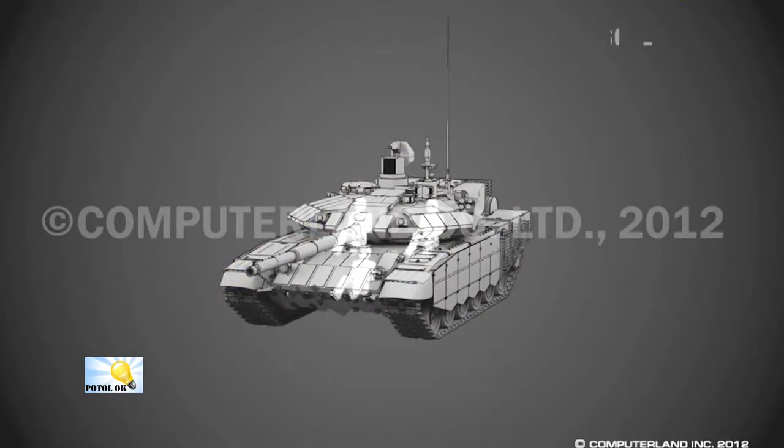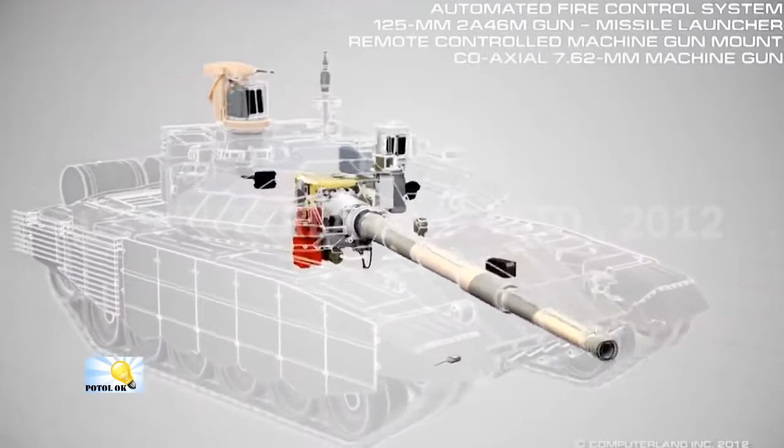In terms of firepower, the new Russian tank is superior to most of its equivalents worldwide, particularly in terms of searching capabilities, speed of target detection, accuracy, and effective fire range. Perfection is accomplished by combining the new automated fire control system with the improved tank gun, the innovative remote-controlled machine gun mount, and the modernized guided weapon system. 2A46 M5 gun.

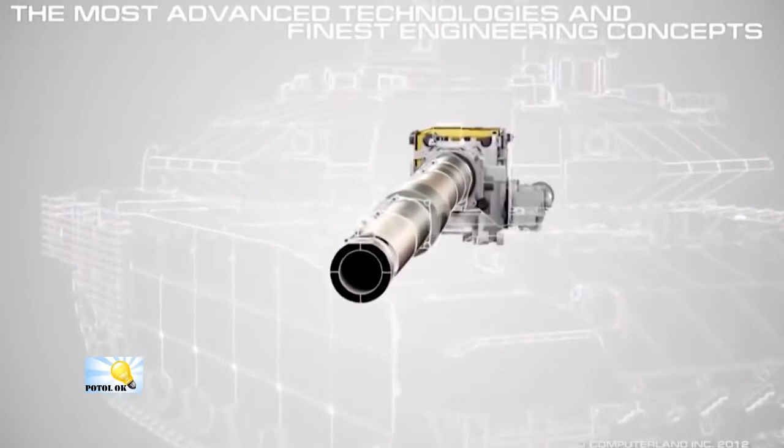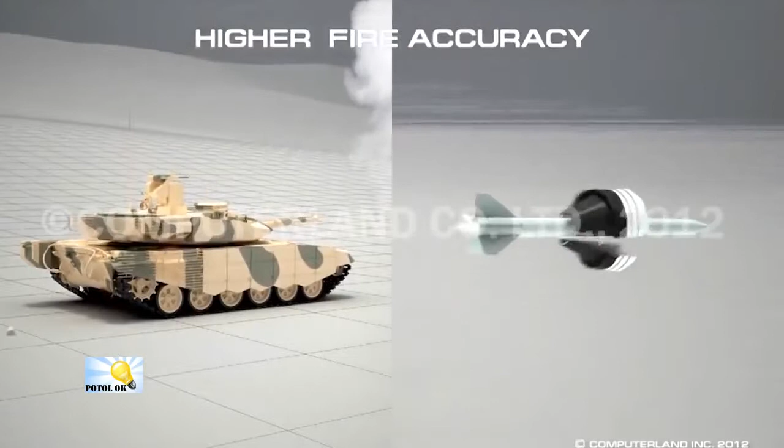The most advanced technologies and finest engineering concepts, well grounded in years of experience in tank, artillery design and manufacturing, are applied in the making of the enhanced 125mm gun. The improvements have provided for higher precision and fire accuracy due to the new constructive solutions and technologies introduced at the production stage.

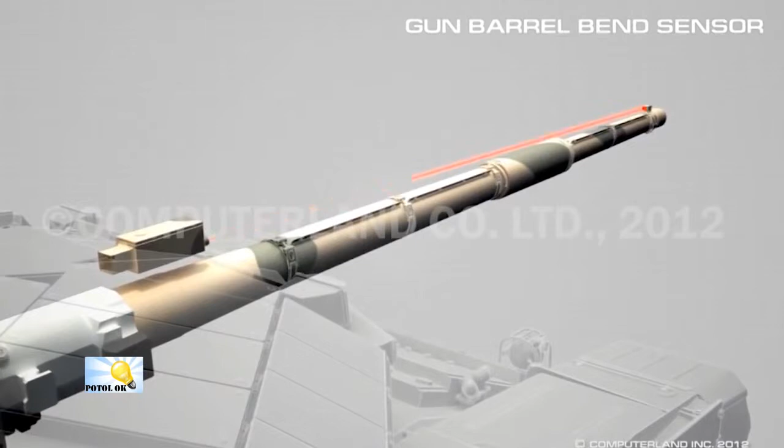The gun has a high rate of effective fire range with conventional ammunition. For example, with the APDS projectile, the range is up to 2700 meters, which is the best result in the world. The tank is armed with the improved 2A46 M5 gun. In addition to the engineering solutions improving the gun itself, the 2A46 M5 is equipped with a barrel bend sensor to increase fire accuracy. This device registers the bending of the barrel, resulting from environmental conditions and interior heat inside the barrel upon firing, and enters the correction data into the fire control system.

The constantly high rate of fire is up to 8 rounds per minute, which is ensured by the automatic loader. The rate of fire is sustained on the move under any conditions. In this respect, the tank is unsurpassed and has no rivals in the world. The automatic loader holds 22 out of the 40 rounds the tank carries.

The tank's ammunition includes 4 types of gun rounds, which guarantee destruction of all enemy targets and successful execution of a wide range of fire missions on battlefield. HEAT shells are to destroy armored vehicles, brick and reinforced concrete structures, as well as manpower sheltered in field fortifications. APDS projectiles are designed to defeat modern tanks with combined armor protection.

The guided missile with a shaped charge warhead hits armored and heavily protected small-sized targets with high accuracy. In addition, it can be used to destroy low-flying helicopters. High-explosive fragmentation shells are essential in combat against manpower, artillery, and field engineering facilities.

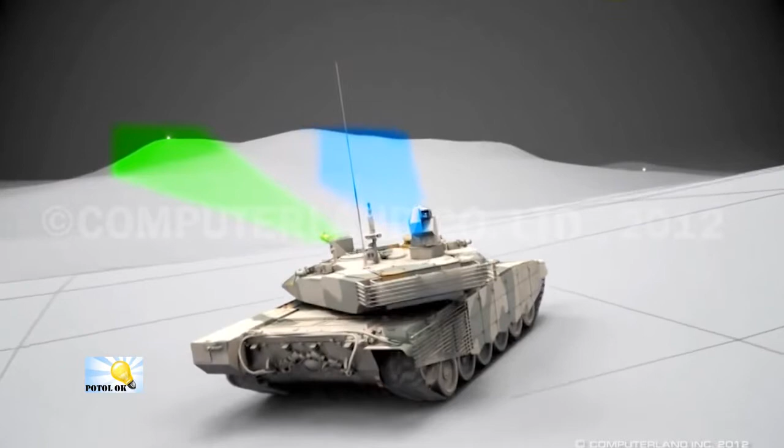The T-90S modernized tank has an extra firing channel made up by the remotely operated machine gun mount. Aiming of the machine gun at all aspect angles is conducted by means of the commander's panoramic sight. Staying inside the tank, independent of the gunner's actions, and regardless of the main gun and combat turret position, the commander can deliver accurately aimed fire and destroy manpower and anti-tank firepower of the enemy at any time round the clock, especially on the flanks and in the rear, in the course of highly mobile combat operations in isolation from the main body. The machine gun mount is stabilized in elevation and azimuth, and therefore can destroy targets practically all around.

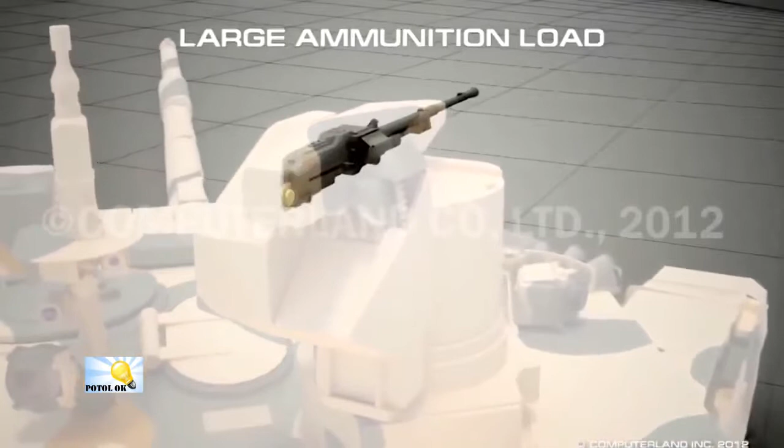Installing a 7.62mm coaxial machine gun on the mount has increased the amount of ammunition to 800 rounds in 2 magazines of 400 rounds each and ensured long-term combat with no need to reload. The machine gun on the mount is unified with the coaxial machine gun of the tank's main armament.

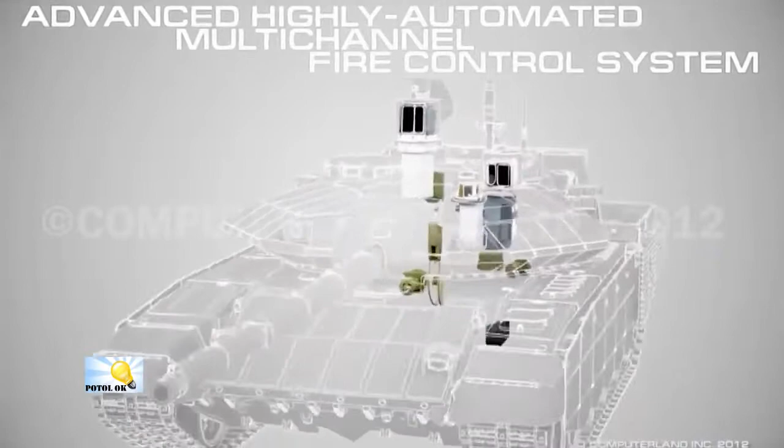The fire control system is fully upgraded. Now it includes a commander's sight, a gunner's sight and a parallel sight, a new weapon stabilizer and a new ballistic computer with an extended set of sensors. There is also a component previously absent, the digital image processing equipment.

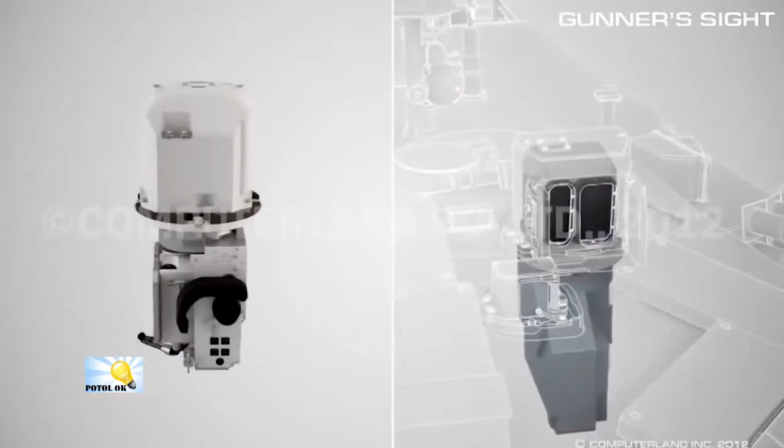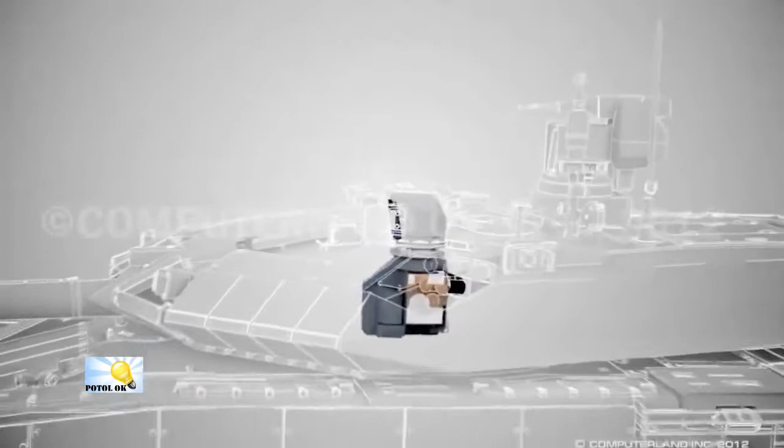The gunner's sight with 2-axis independent stabilization of field of view is multi-channel. It has a sighting and a thermal channel, a built-in laser rangefinder and a missile control laser channel. The sight enables the gunner to detect and accurately hit targets under any conditions. That is due to the improved optics and high-precision stabilization of the sight's field of view on both vertical and horizontal axes at 0.1 milliradians.

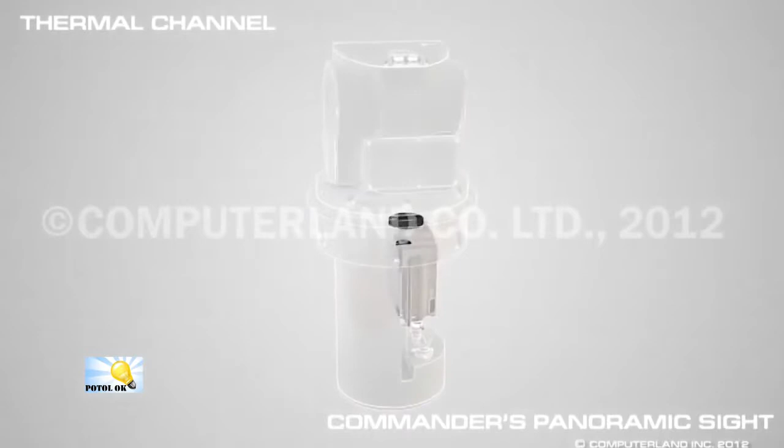Commander's station has been largely improved in terms of target detection, firing and combat management. For this purpose, a panoramic sight, 8 prismatic vision devices and the all-round video observation system are newly installed on the T-90S modernized tank. Commander's panoramic sight with the 2-axis independent stabilization of field of view has a thermal and a television channel and a built-in laser rangefinder. It provides 360-degree target detection and tracking.

External video observation system ensures the commander's all-round surveillance over the adjacent area. Its 4 television cameras can work in low light conditions. Commander's nearest visibility is simultaneously provided by the 8 prismatic vision devices located around the perimeter of the hatch. Each device has an indicator showing presence of the panorama field of view in the device's observation sector.

There is a mode of aligning the sighting line of the panoramic sight with either a chosen prismatic vision device around the commander's hatch or the field of view axis of one of the TV cameras. One can also automatically align the panoramic sighting line with the direction on the electronic map on the commander's multifunctional control panel. All those functions significantly increase the commander's visual and searching capabilities.

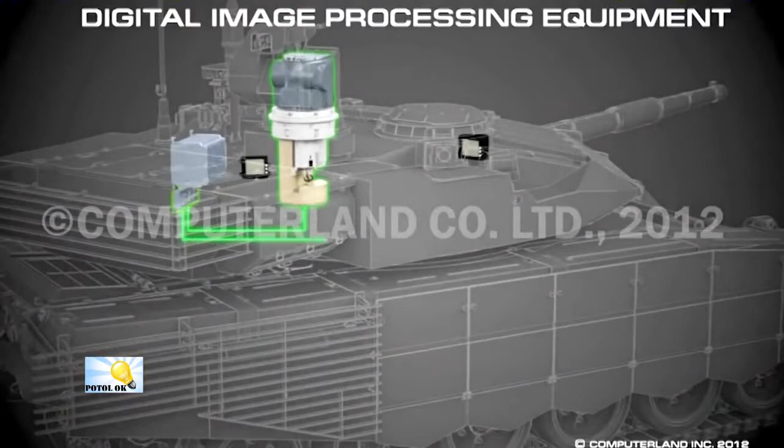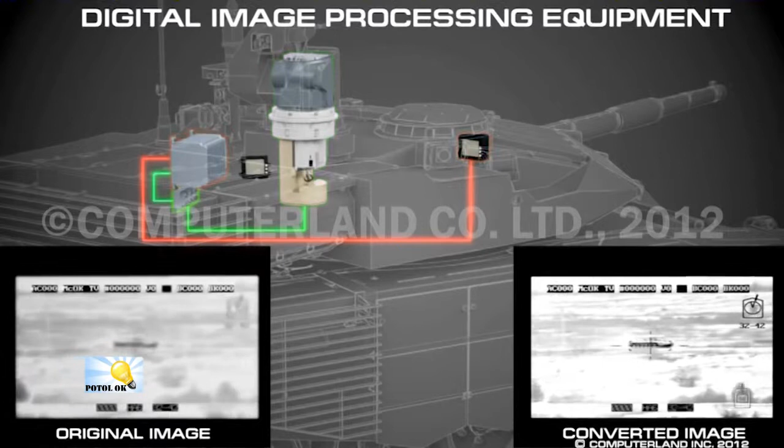Image quality of the commander's video viewing device is enhanced due to the system of digital image processing of the video signals from the thermal and television observation channels. Therefore, a T-90S commander can recognize targets at distances of up to 5,000 meters. In addition, the equipment performs the function of automatic target tracking, and targets may also be tracked independently by the commander and the gunner at the same time.

The T-90S modernized tank is equipped with a TV parallel sight shared by the gunner and the commander, who can thus conduct observation and firing when their respective sights are out of order.

The ballistic computer is there to provide automatic record of all data affecting the firing conditions right before the shooting. This eliminates errors in the input data and thus considerably increases the fire accuracy. Moreover, due to the flexibly reprogrammable circuit for calculation algorithms, one can enter the ballistic parameters for new types of ammunition.

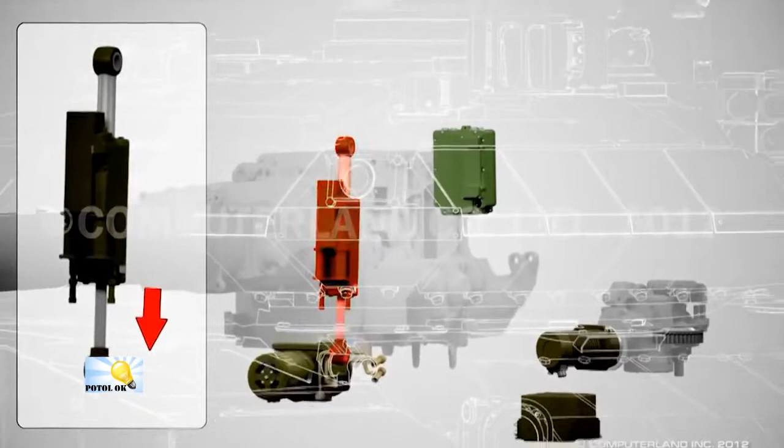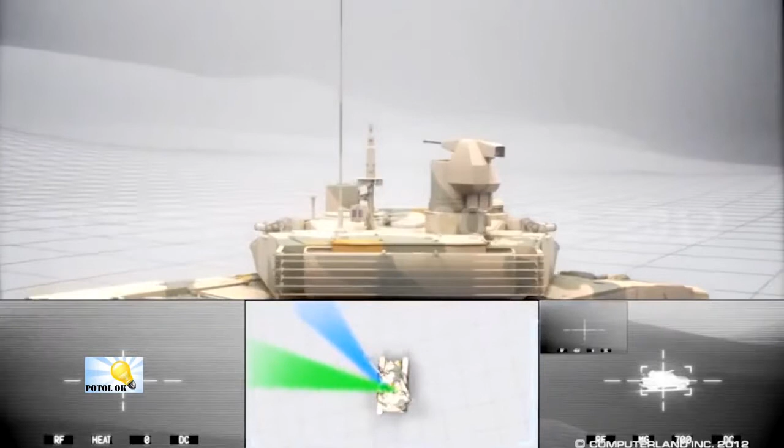A new weapon stabilizer is installed on the T-90S modernized tank. It is based on digital technologies. This provides high stabilization precision and increases the speed of horizontal swapping of weapons. The maximum efficiency of the tank weapons in use is determined by perfect adjustment of the commander's and gunner's sighting options and by the opening of their respective independent channels of target detection, tracking and destruction.

Those options realize the highly effective hunter-killer mode of the fire control system, wherein the commander conducts observation and assessment of the tactical situation regardless of time of day, detects and recognizes targets, whereupon he, so to speak, passes the targets over to the gunner for extermination and goes on with the target search.

Implementation of new engineering solutions in the armament and fire control system of the tank brings about the following improvements. The target detection period is reduced. The preparation time for firing the first round is cut down to 10 seconds, which is the best rate in the world. The range of target detection is increased to up to 5,000 meters in daylight and at least 4,000 meters at night. The effective ammunition firing range has risen. The probability for the guided missile to hit the target is rated closely to 100%.

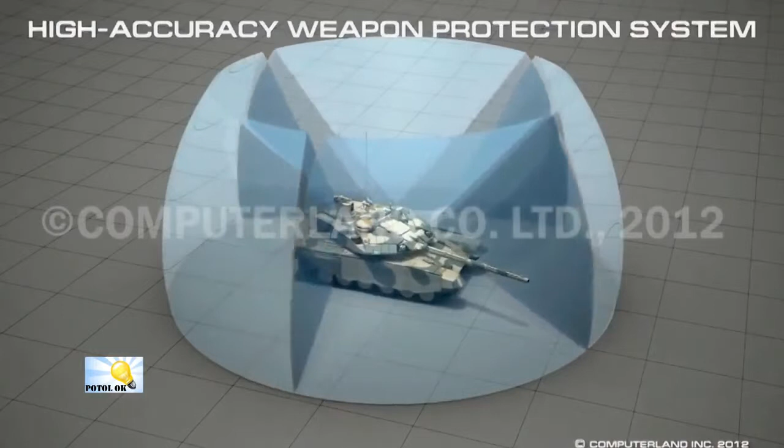The T-90S modernized tank design retains the traditional Russian ideology of complex protection. In spite of the slight increase in the tank's weight, the vehicle has low silhouette and small dimensions. In combination with camouflage painting corresponding to the combat terrain and the heat shields around the power pack compartment, this makes the tank poorly noticeable on battlefield in both infrared and optical range and reduces the chances for its being hit. Once the tank is detected, its automatic screening system prevents the vehicle from being hit by anti-tank missiles.

Almost half a century of experience in creating dynamic protection for military vehicles and our world leadership in the design and implementation of such technologies have made it possible for us to develop the new integrated protection system for the T-90S modernized tank, which is resistant to all anti-tank ammunition types and which is based upon the new generation modular principle. Additional security is provided by installation of louver panels to protect the power pack compartment and turret rear from anti-tank grenades.

With the presently achieved increase in operation safety, when bullets or fragments penetrate the dynamic protection elements, they do not detonate. Dynamic protection guarantees effective resistance to tandem warheads, secures the tank from the EFP ammunition types, and reduces the impact of shaped charges and armor-piercing projectiles to 80% and 50% respectively. An important advantage of the modular structure of the dynamic protection system is that it considerably simplifies repair and replacement of parts. The protection system is easily operated and maintainable even in combat conditions.

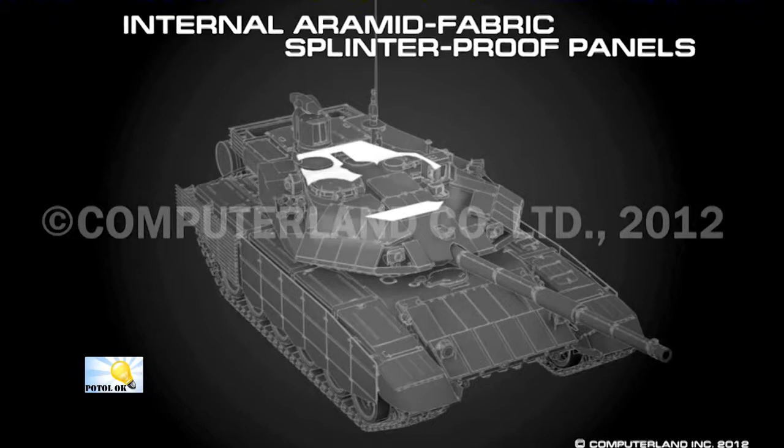Complex protection also includes interior anti-fragmentation panels made of aramid fabric to secure the crew and equipment from the secondary flux of tank fragments. For the outside protection of the sight windows, armored covers are installed, which are remote controlled from the crew compartment. To sum it up, a comprehensive set of safety-inducing measures has ensured the two vital features of the tank's protection systems, namely the vehicle's unsurpassed durability on battlefield and the high survivability of the crew under intensive anti-tank activities of the enemy.

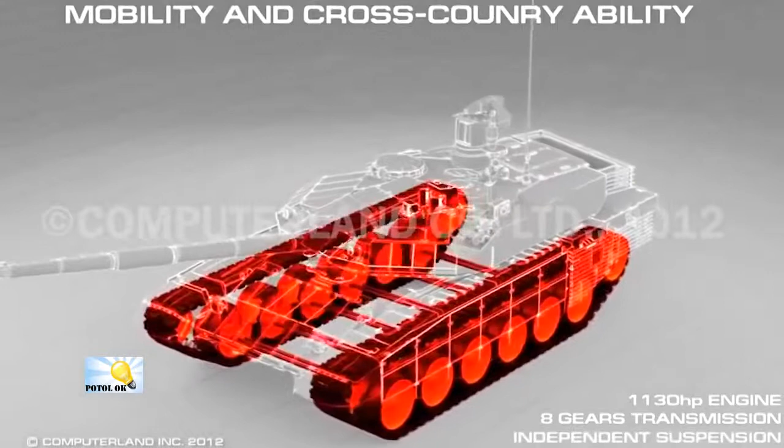The T-90S modernized tank demonstrates high mobility and control, even under extreme heat and dust conditions. This is accomplished by the installation of the high-efficiency 1130 horsepower engine and the steering control system with automatic gear shifter and steering wheel control linkage. As a result, the tank is very fast and maneuverable. Its excellent off-road capabilities are due to its low weight, which allows the modernized T-90S to confidently take any routes on and off roads and bridges in various weather conditions. Furthermore, its fine chassis account for the wonderful smoothness on the move.

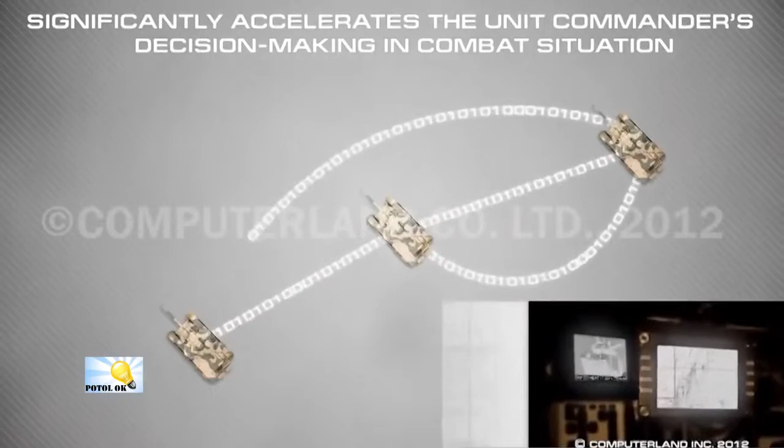The tank is equipped with a broadband 2-channel USW radio set, combined navigation system, and the equipment to integrate the tank into the division battle management system. The interaction control system provides the following. It receives signals by GLONASS and Navstar satellite navigation systems. It significantly accelerates the unit commander's decision-making in combat situation. It considerably reduces the amount of time required for tactical situation assessment and the crew's effective response.